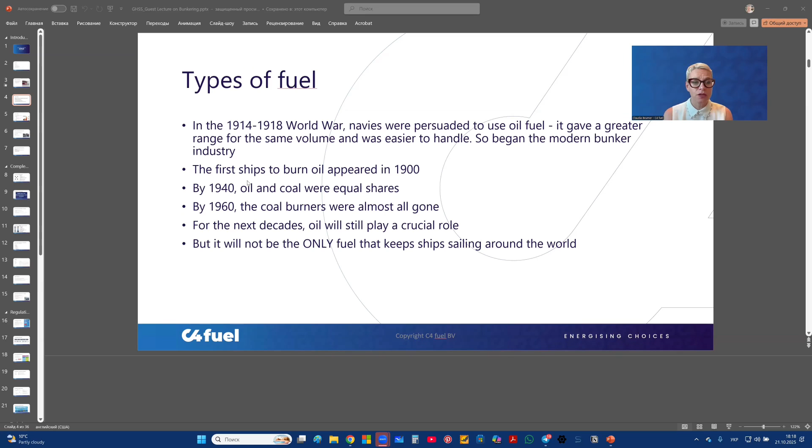And that also made our industry very spoiled, because everything else that we do is considered to be more expensive. And that's not because those fuels are that expensive. It's just that the current fuel was so cheap because it was a waste product. So we have the conventional fuels, which all come from the crude: HFO, heavy fuel oil, MGO, marine gas oil, and all of those substances. We also have the gaseous fuels, of course, like LNG and LPG. They also come from the same source.

And then nowadays we have a mix, as said before, with also the low and zero carbon fuels like the biodiesels. And quite often you see people talking about a B24 or a B30. Basically that means that within the blend there is 24% bio. So B24 is 24% biodiesel and the rest is fossil diesel. So the higher the B, the more bio component. All of those biodiesels can have different feedstocks. Most of them are FAME-based, fatty acid methyl ester. You don't need to remember, but it's a feedstock for the biodiesels.

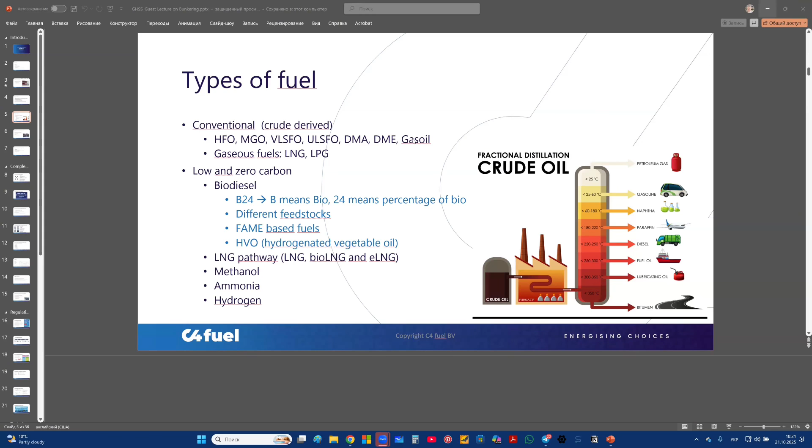Yeah, and it's not only the different fuels that make bunkering so special. As said, it's the transfer of fuel from a cargo tank to a fuel tank. But fuel for most ship owners is around 70% of the operational cost. So there is a lot of focus from all the stakeholders in that supply chain on the fuel. But all of those stakeholders also have different KPIs. The fuel buyer, of course, wants the cheapest fuel. The chief engineer on the vessel wants the highest quality because he doesn't want any issues.

So everybody has a different aspect and a different angle on fuel, but they all have something to say about it. On top of that, there are operational challenges, and I will go into that in a bit more detail later on. Bunkering sounds easy, but it's not. Performing a good bunker requires skills, and the whole supply chain delivers quite a lot of challenges for people.

And to make it even more complex, we have rules and regulations in place, not only the environmental regulations, but also where can you bunker, what do you have to comply with? And as we all know, geopolitics play a huge role. Shipping is one of the very few global industries. So ships can be today in Rotterdam and next week somewhere else, and there are all different rules and regulations that they have to follow. And when we have sanctions coming into play, it makes it very complex.

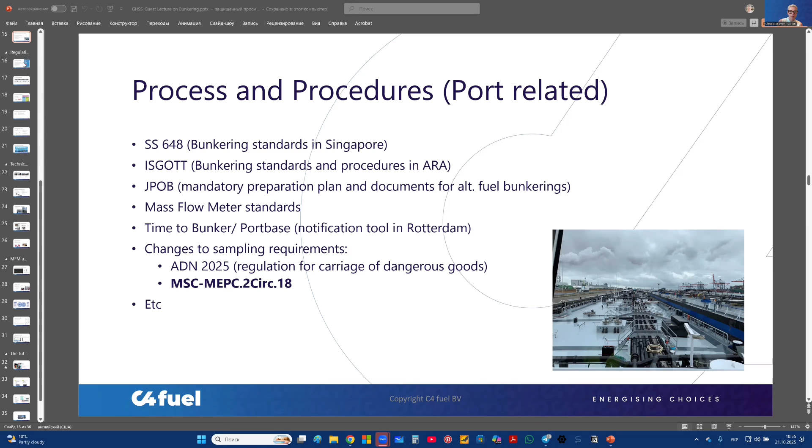And some of them just put it into one big bucket and they just say this is the price. And some split it up and do it as an add-on. So it depends on the type of barging contract they have. Yeah, you can go to the next slide.

So yeah, besides all of the local processes and procedures, of course, we also have the regulatory landscape. It all started with the Paris Agreement, where as a world, as a society, we have to limit global warming. And that also reflects on shipping, because we are more and more being forced to use less fossil fuels and reduce emissions. When we look at IMO 2020, that was specifically implemented to limit the amount of sulfur in the fuel oil.

On top of that, there were already ECA zones which even have a more strict limit of 0.1%. So in general, in 2020, the whole industry went from 3.5% maximum to 0.5. But on top of that, we had the ECA zones, emission control areas, or the SECA zones, sulfur emission control areas, where there was even a more strict limit. Since 2020, those areas have been expanded and more areas have become ECA zones.

And I can still remember, I think it was in 2019, I was at a bunker conference where many of the fuel suppliers and fuel producers were complaining about IMO 2020 because it would have a huge impact on their refinery process and it would make everything more expensive and there would never be enough for everybody. And all of the ship owners were really concerned that this would indeed lead to lack of availability of fuels.

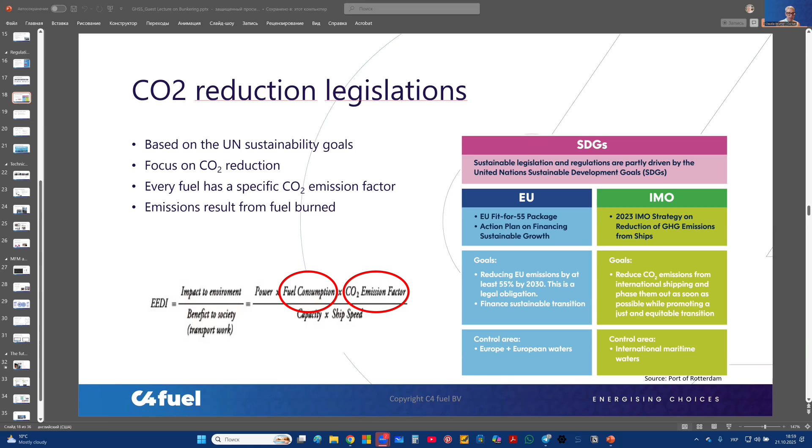So this is why you see that a lot of the container vessels some years ago, they got bigger and bigger. So that will mean, indeed, that you improve your EEDI. So all of those regulations, and then you can go to the next slide. All of those regulations focus on the fuel being used and amount and type of fuel. So on the design of the ship, it's the EEDI, the Energy Efficiency Design Index.

On an existing ship, you can calculate the EEXI. So if you do a retrofit and you put a new engine in it or something else, you can calculate the EEXI. Operational, we have the carbon intensity indicator. So suddenly also the number of miles and the amount of cargo being transported has an impact.

And then of course there is the Ship Energy Efficiency Management Plan, SEEMP, which every vessel operator has to perform to show that this is what we do to reduce fuel consumption and measure also the impact of the actions that they take.

And as I said before, in the complexity of stakeholders, we also have the cargo owners having something to say about the fuel. That's about the Scope 3 emissions. Because large corporates in Europe, nowadays, they have to report their CO2 emissions. And then I think you can go to the next slide. Yeah.

So I will come back to the Scope 3 emissions after this slide, because I wanted to highlight this first. We spoke about the local regulations, ECA zones, SECA zones. We also have the Norwegian fjords being emission-free, FuelEU, Renewable Energy Directive, all sorts of local regulations focusing on emission reduction. On the global side, there was a plan to come with the IMO net zero framework.

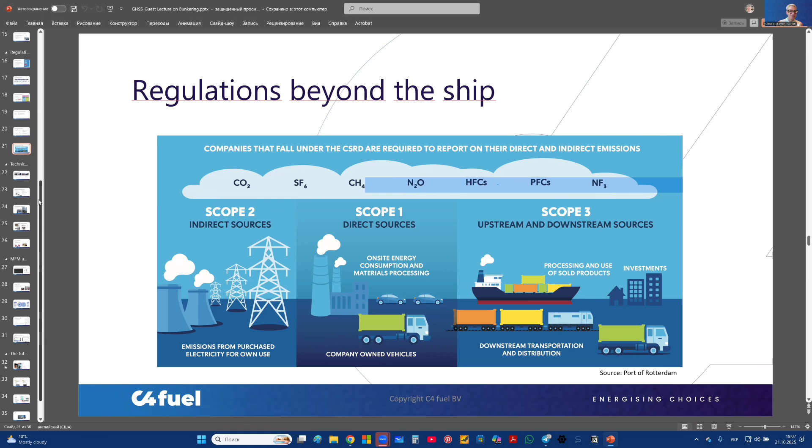And then we'll dive into the bunkering itself, so we go a bit more into the technical aspects. Yeah, you can go to the next slide. So when we look at the bunkering basics, there are different ways of bunkering, but they are all connected by the same dynamics. Of course, we have ship to ship, barge to ship. We have truck to ship for the smaller amounts or specific fuels. Shore to ship, which you quite often see with tankers.

Then there are always a lot of discussions on the flow rate which is acceptable. Barge pumps can pump really high flow rates, but quite often, as the crew on the receiving vessel is busy with so many other tasks, they prefer to have a slightly lower flow rate, just to make sure that if something goes wrong, you don't have huge spills. So all of these things have to be discussed up front. Do we do SIMOPS? What is the expected flow rate? What is the temperature? Because that tells you something about the pressure needed, the communication lines. So all of those elements need to be discussed before you can start doing the bunkering.

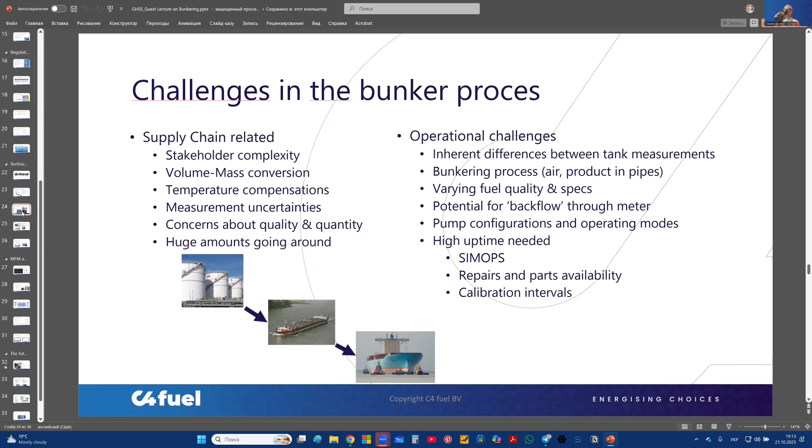And there were a lot of discussions between the barge and the receiving side. Eventually, people found out that it had to do with the pumps, so they changed the pumps and everything was good. But also using mass flow meters requires a different way of bunkering. It requires specific actions that you have to take before you start to bunker. Conventional barge operators are not used to that, and they don't like it. So there are a lot of differences in the way of operating that determine if it's a good bunker or not. But also the temperature, the viscosity, and alternative fuels.

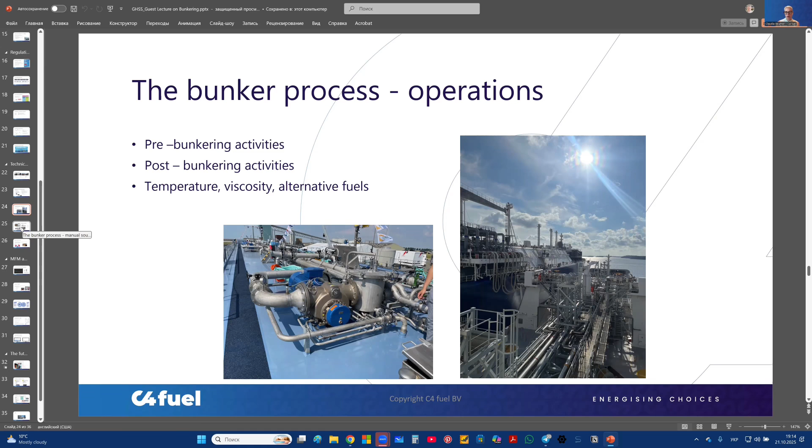And of course, I've mentioned mass flow meters a couple of times, but in many parts of the world, they are not standard yet. So a lot of the measurements are being done on manual sounding. Most people that do manual sounding know how to do it, but it can also go wrong. So you can have a tape error leading to a wrong measurement, and then eventually leading to a letter of protest and discussions with the barge. Temperature sensors that are not hanging in the cargo but above, and then with the calculation from level and temperature and density to volume and to mass, you get an error and you can't really trace where the error comes from.

But also stratification. It doesn't happen that often with conventional fuels, but it is something that we have seen a lot in the early days of biofuels. So depending on where the density is measured in your tank, you can get a different density. And again, calculating volume with density to mass can lead to an error or an uncertainty or an inaccuracy. So manual sounding can be done very accurately, but because of all of those conversion steps and the potential errors, it can also be very wrong. You never know. So you always have to make sure that you follow the right process and the right measurements.

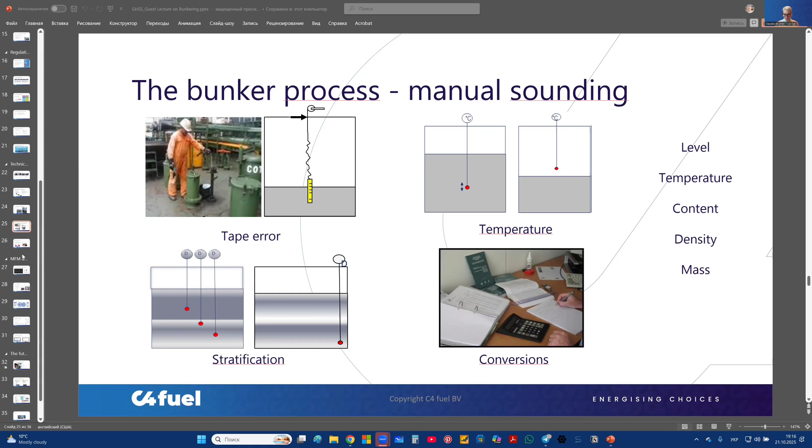And that's a direct mass measurement. And people often ask me, why should I measure mass? Well, if we look at Paris, there is a standard kilogram, because a kilogram is a kilogram, independent of what the temperature is. But there is not one standard liter, because if we have a liter or a ton of fuel oil and the temperature changes, the volume increases. So with a volumetric measurement, if the temperature increases and you don't do the right calculation, you think that you got 1027 liters, but basically you only got 1000 because the volume expanded.

But air doesn't have a mass. And yeah, I think it still happens in some parts around the world where we have the cappuccino effect. That means that they on purpose inject air into the fuel to boost the volume. Then of course the tank measurements on the receiving side think that there are full tanks. And then after a couple of days sailing, all of the air has disappeared from the fuel and the volume has dropped. And there were issues where vessels got a blackout in the middle of the ocean because they didn't get the amount of fuel that they thought they got. So that was also the reason why people moved to pushing for mass flow meters for bunkering. And then you can go to the next slide.

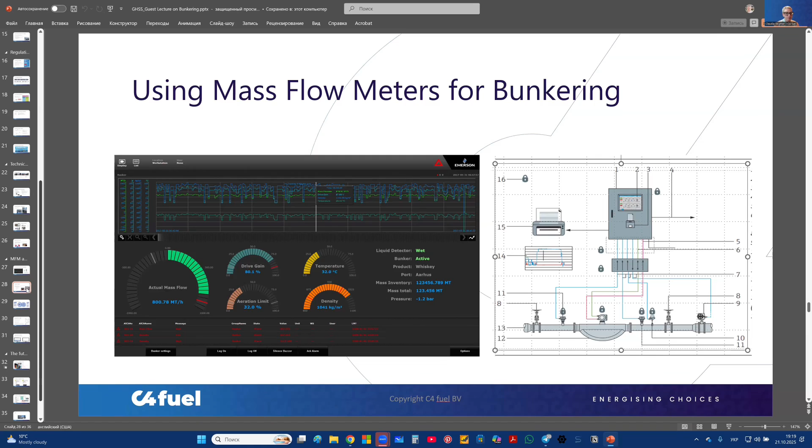But when we look at mass flow meters for bunkering, or in general every measurement, and you can go to the next slide, please. It is a custody transfer measurement, and that means that it's a sales transaction where the ownership of the property changes from one to the other. And it also has specific requirements for the measurement devices that are used. Those sounding tapes have to be calibrated, but mass flow meters also have to be compliant with MID, the Measuring Instruments Directive. And we have those applications as well on the land side, gas pipelines, the gasoline for your car.

But there is one main difference between all of those measurements and bunkering, and that's air. Because if you fill up your car, there is this little glass bulb at the gas station to check that there is no air, because that's a condition to do an accurate measurement. But in bunkering, you can't really do without air because of the process conditions. The gas station also shows you that the whole measurement is calibrated and checked on an annual basis. So you have to do that for measurements in bunkering as well. So mass flow meters for bunkering have to comply with all of those regulations. And because the process conditions are so challenging, you cannot do it with just a meter. So you have a full system around it, which quite often is very expensive. But that's the only way to do an accurate measurement. And then we can go to the next slide.

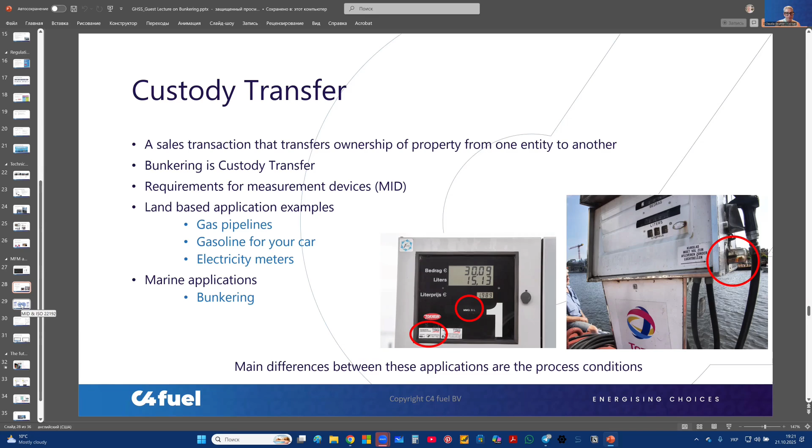And when Singapore started to make the use of mass flow meters mandatory, they also realized that it's one thing to have the hardware and an MID compliant measurement system, but we need more to make sure that people follow the right procedures, that they know how to operate that measurement system, how to operate the pumps, that there is no excessive air. We need an industry standard. And that was ISO 22192, sorry, I see a typo there. So it goes beyond MID. It's an industry guidance and it includes the whole system, so the hardware, but also the procedures and the documentation. So when you have an ISO compliant barge, that means that the whole system is certified. All of the flanges, all of the lines are sealed.

So you guarantee that everything is delivered goes through the flow meter, so you get the most accurate possible measurement. And it's also accredited by a third party, so an independent body that checks if everything is done correctly. And with that, the industry tries to have a standard which is global and provides the transparency and the trust. Because, using your words again, Kirill, barge operators don't like letters of protest, and it's a lengthy process and it takes a lot of time.

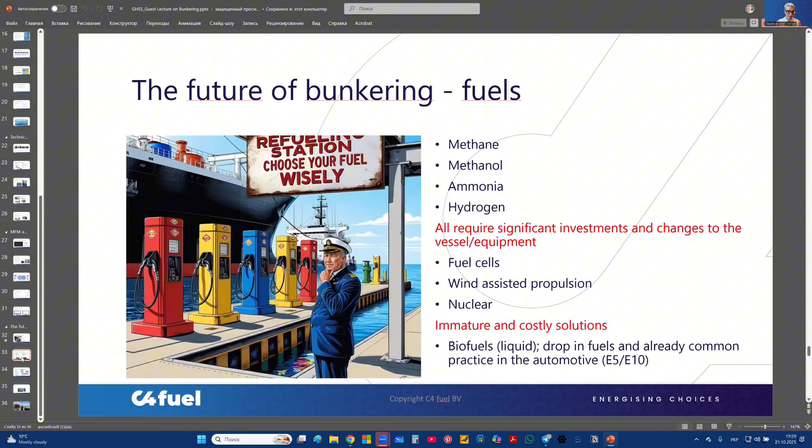But yeah, how will those different fuels impact the way we work in the industry? Well, first of all, of course, it will impact the users. The availability of fuel, the planning of trading routes will be more complex. So that's where those digital tools also come into play. Spot market versus long-term contracts.

Yes, MGO is still fairly easy to buy on a spot market. But as said, methanol, there is no spot market. So if ship owners go for a different fuel, they really have to look into long-term contracts and secure their supply. Hedging, take LNG. LNG is very subject to the geopolitics around us. So prices can go up and down and can change overnight. So if you can hedge your prices for those kind of fuels, it has a positive impact.

But everything we do will be more expensive because we are spoiled by burning the bottom of the barrel. So everything we do will have an impact. And yeah, people are afraid to make a wrong choice, which I fully understand. But the only wrong choice is not doing anything because eventually we have to go. And the closer we get to the deadline, the more difficult it will be to make a choice.

So it will impact the users, but it will also impact the suppliers. They will also face the spot market versus long-term contracts. But the flexibility of bunker barges will also be less, because you cannot use a traditional oil barge, for example, carrying a B30 or a B35, because then you need to have a chemical barge. And LNG and methanol and ammonia eventually require completely different type of barges, which are also way more costly and thus have a higher day rate.